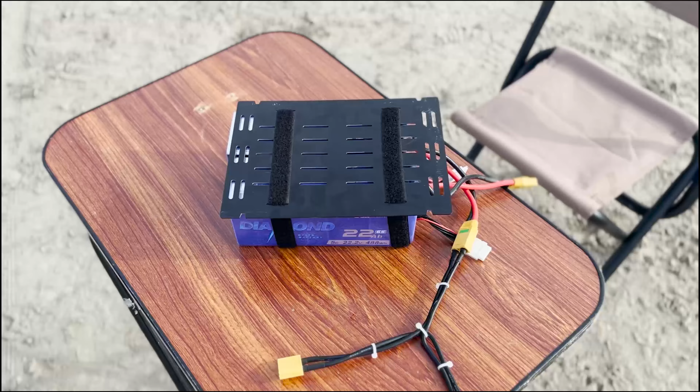It has an empty weight of 16.5 pounds and can bear up to 14 pounds of payload. The Hobbywing X6 motor has a maximum thrust of 12 kg per axis. Its high-strength aluminium alloy material optimizes structural design. The 23 by 8.8-inch propellers are used on the Recluse to provide lift and stability. Recluse uses two LiPo 6S batteries in series with a total capacity of 22 Ah.

Recluse is equipped with the Pixhawk Cube Orange autopilot system and uses Skydroid H12 radio system and GoPro Hero 5. Recluse is equipped with 6 high-performance Hobbywing X6 180 kV motors with 23-inch carbon fiber propellers attached with 60 amp ESCs, giving it higher efficiency and more stable performance. The propulsion system can carry a load of 39.6 to 86 pounds. The propellers have an optimized aerodynamic design.

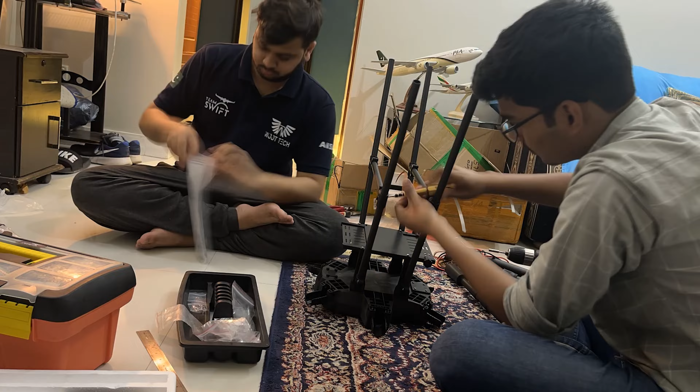The objective of the SUAS competition is to design and operate an autonomous unmanned aerial system that can complete a mission within a specific time frame and meet certain requirements. These requirements include keeping setup time under 15 minutes, mission time under 30 minutes, ensuring 95% or a higher waypoint accuracy, and delivering an object within 15 feet of a potential drop location without damage.

The system also needs to be able to detect objects autonomously and classify them as standard or emergent, communicate between the drone and ground station through encrypted communication, and use video transmission. To achieve these goals, the system requires two operators, a safety pilot and a GCS operator. Obstacle avoidance is achieved through the use of sensors, algorithms, and classifiers.

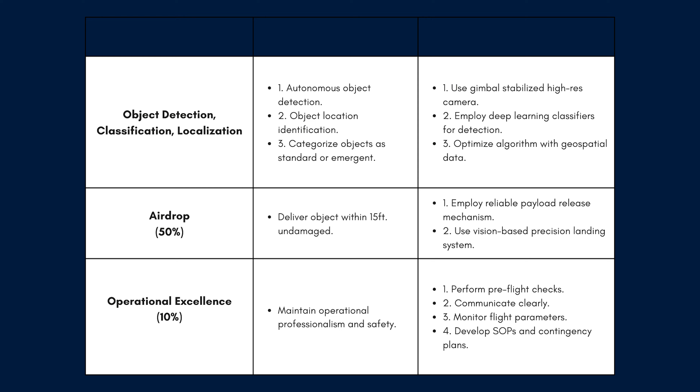The system must be optimized for operational excellence and able to adapt to changing conditions during the mission. The design of the UAS plays a crucial role in ensuring that the system meets all requirements and can perform the necessary tasks efficiently and accurately. We chose a hexacopter as our aircraft system because of a high payload capacity, high maneuverability, and compact design.

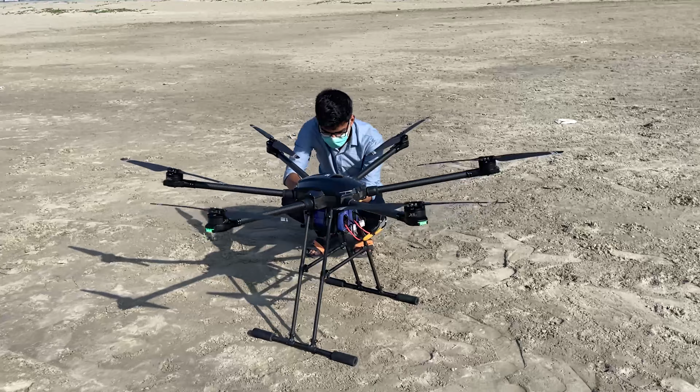Recluse is made wholly of carbon fiber, making it lightweight with greater tensile strength. It has a wheelbase of 4.2 feet and a height of 2.25 feet. Recluse has a full load weight of 36.2 pounds and can fly for 45 minutes at a maximum speed of 28 miles per hour without any complication, making it possible to complete missions in a minimum time of 25.7 minutes.

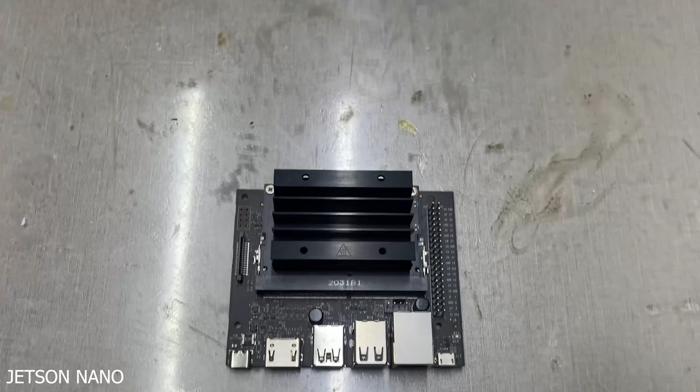choice for the camera: weight, cost, effective megapixels, and hardware compatibility. Recluse uses the GoPro Hero 5 camera and relays the photos to the ground station for classification and review. It takes a picture depending on the algorithm's ability to recognize when and where it is prompted to take a photo for image classification. This 12 megapixel camera can resolve objects required by the competition with high accuracy due to its high horizontal FOV of 122 degrees and vertical FOV of 94 degrees.

The camera offers a maximum resolution of 4K with maximum 30 frames per second. We will be using a 2-axis brushless gimbal for camera stabilization and 2-axis control. The team uses an algorithm to autonomously detect, localize, and classify the objects from an image. A convolutional neural network (CNN) was developed to autonomously detect, localize, and classify objects.

A custom modified deep learning architecture called YOLO is used to detect the underlying shapes and the class of emergent objects. The architecture was trained on a customized data set that contained almost 700,000 target images. The data set included all possible combinations of target characteristics such as varying heights, terrains, obliqueness, rotations, and noises.

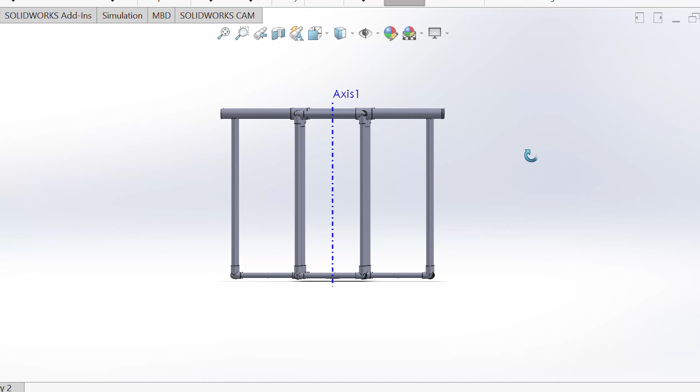Our drone can safely drop 500 gram bottles from 75 feet using parachutes, making it the perfect solution for emergency supplies, food and water drops, and more. Our payload consists of 5 bottles, each weighing approximately 500 grams and holding 16.9 ounces of liquid. They're supported by a sturdy carbon fiber frame with flaps that hold the bottles in place while in the air. Each bottle is wrapped with a durable shock-absorbing material and attached to a folded parachute, ready to be deployed when it's time to drop.

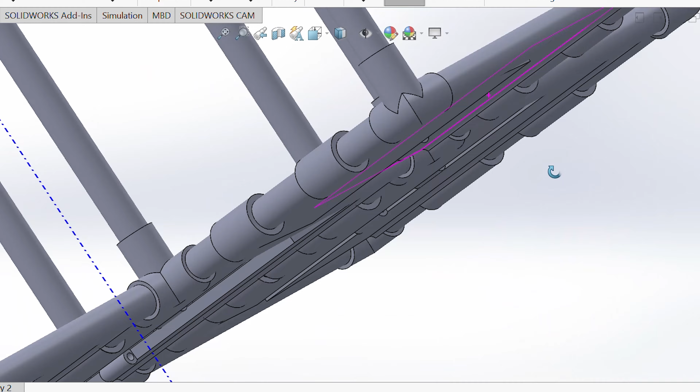To determine the optimal drop time, we use our drone's advanced autopilot system, which calculates factors such as wind speed, direction, payload weight, and parachute size. The drone hovers at a height of 75 feet when the target location is detected, and the autopilot system activates a corresponding servo, which rotates the flap beneath the compartment holding the bottle by 90 degrees, releasing the bottle within. As soon as the bottle is dropped, the parachute opens, allowing for a controlled and safe descent to the ground.

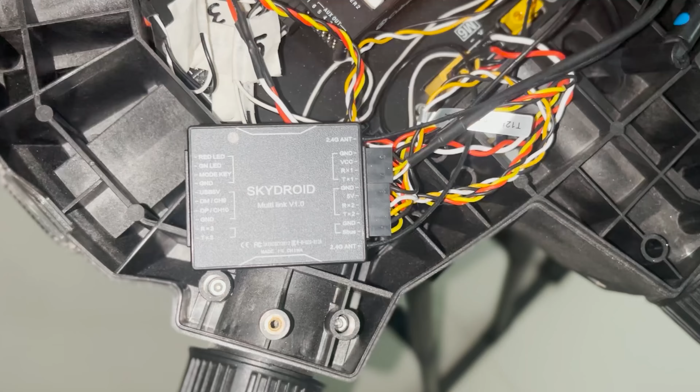The SkyDroid H12 radio system operates in the 2.4 GHz frequency range with a maximum range of 30 km. To establish communication between the drone and the ground station, the SkyDroid H12 radio module is connected to the Pixhawk flight controller. 900 MHz telemetry allows the wireless communication of data from the ground station to the drone. It can operate in the range of 900 to 928 MHz frequency. The expected performance of the SkyDroid H12 radio system is reliable communication with low latency and high throughput within the specified range.

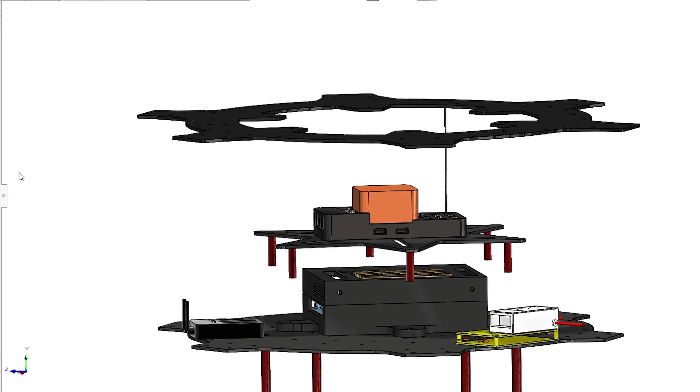Recluse is powered by two high-capacity 6S batteries with a total capacity of 22,000 mAh, providing increased power output for advanced flight performance and protected by an impact-resistant waterproof casing. It provides Recluse a longer flight time without compromising on the functionality of other systems powered by it.

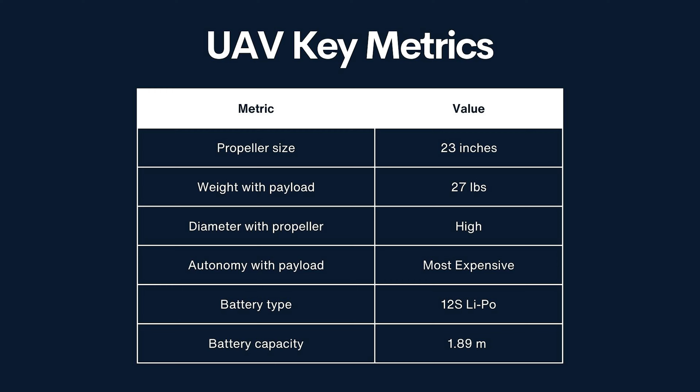Recluse is equipped with 6 high-performance Hobbywing X6 180 kV motors with 23-inch carbon fiber propellers attached with 60 amp ESCs, giving it higher efficiency and more stable performance. The propulsion system can carry a load of 39.6 to 86 pounds. The propellers have an optimized aerodynamic shape, which gives the aircraft system its high thrust. The Recluse was able to reach an altitude of 656.2 feet during the flights. It was able to reach a maximum speed of 30 miles per hour.

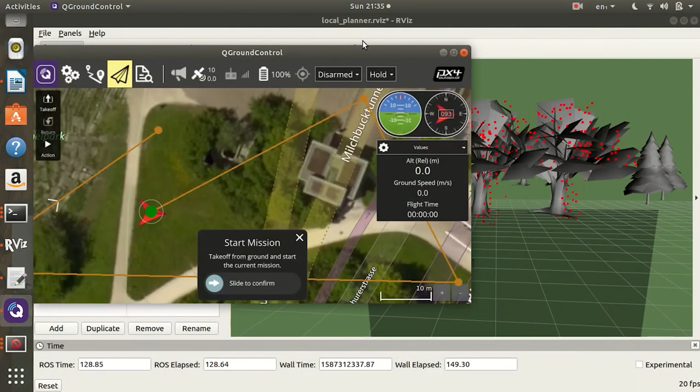To accomplish the task of obstacle avoidance, our team utilized multiple single-direction TF Mini S micro lidars. An algorithm created by our team utilized waypoint coordinates, obstacle zone centers, and obstacle zone radii as inputs. The algorithm's initial task is to find the shortest path between the waypoints without changing their order. To accomplish this, the algorithm employs the practical and effective Dijkstra's shortest path algorithm.

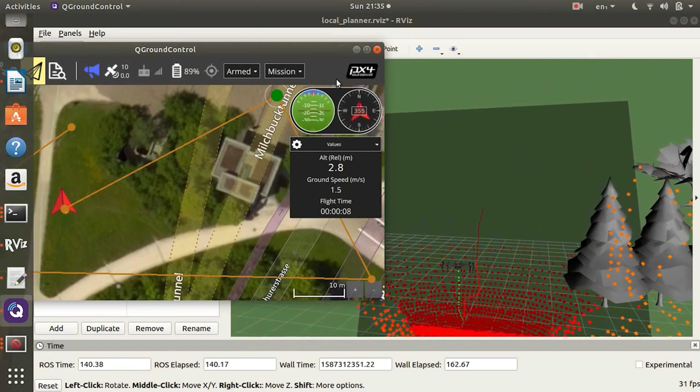In cases where there are obstacle zones present between the waypoints, the algorithm selects an alternative route that is both safe and efficient. Subsequently, the sensors installed on each side of the hexacopter detect any approaching UAVs and modify the flight path to avoid them while maintaining the shortest possible route.

Throughout the design process, our team explored several alternative options before settling on our final design. Initially, we considered quadcopters as an alternative to the hexacopter, but they had limited payload capacity and couldn't lift as much weight as the hexacopter. Jetson Nano was selected among the two other leading companion computers as it had a high processing speed and more RAM, plus it was a cost-effective investment.

Even though the Cube Orange Plus was the expensive choice, we went for the highest processor speed and user-friendliness among the choices at hand. We also tested various frame materials and designs, including pentagonal frames, rectangular frames with different orientations, and materials such as steel, wood, and aluminium.

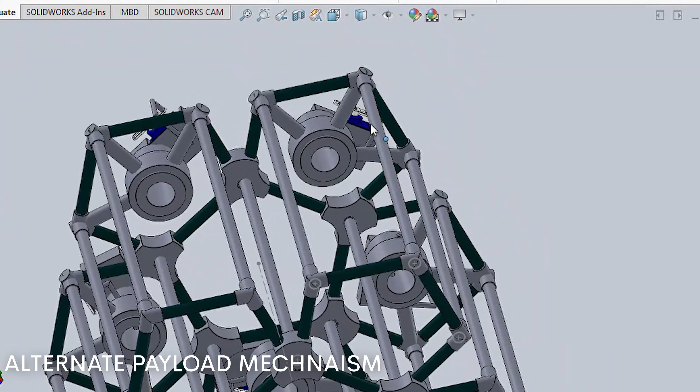However, after rigorous testing and analysis on SolidWorks and ANSYS, we concluded that carbon fiber was the optimal material for our drone's frame. We went with the Hobbywing X6 as it was giving us great balance between thrust and cost. The downside was weight, however there were no negative implications to it. Taking in view the cost, capacity and weight of the battery to provide sufficient flight time, we went with two 6S batteries coupled in series.

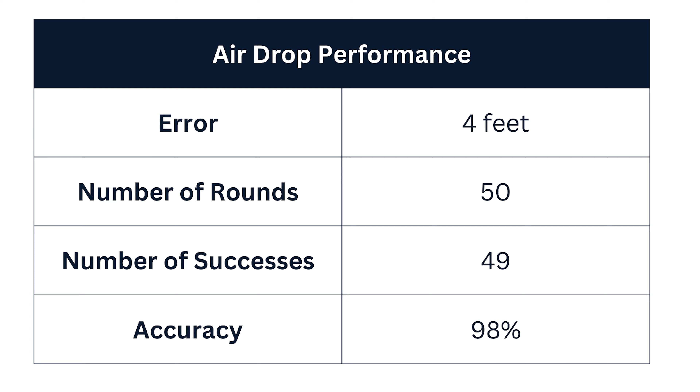The airdrop subsystem underwent rigorous testing to ensure its performance. In total, 50 drop tests were conducted both autonomously and manually, out of which 49 were successful with an error of 4 feet. The SkyDroid H12 radio module communicates telemetry with the ground station using a 2.4 GHz frequency. It had a range of 4.4 miles in air and 0.93 miles on the ground. The subsystem was able to handle interference from other devices such as Wi-Fi or Bluetooth without any significant impact on telemetry data transmission.

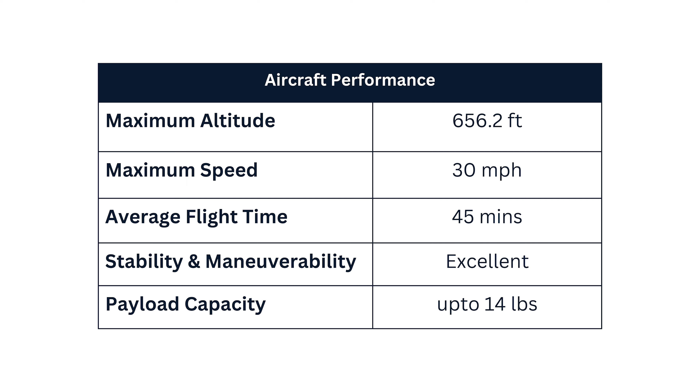To test its capabilities, 143 flights were carried out under different conditions with an accumulative flight time of 23.8 hours. The Recluse was able to reach an altitude of 656.2 feet during the flights. It was able to reach a maximum speed of 30 miles per hour and stay for an average of 45 minutes in the air. The stability and maneuverability were smooth and efficient. The aircraft was tested in windy conditions of up to 28.8 miles per hour on the sea view in Karachi.

The autopilot's advanced flight capabilities include waypoint navigation, automated takeoff and landing, and automatic mission planning. The Cube allows us to fly safely with precision and control. We were able to attempt 67 autonomous flights with a 100% success rate. With an error of 2.3 inches, we were able to navigate through all of the waypoints we set for ourselves. 300 obstacles were encountered by the Recluse, out of which it was able to avoid 298 of them, giving us an accuracy of 99.33%.

Our team completed the pre-flight checks within 10 minutes. Once our system was operational, we had a briefing of 5 minutes before executing the mission command. During the mission, our aircraft flew along a waypoint path and autonomously came within 10 feet of each waypoint while avoiding static and dynamic obstacles. To ensure connectivity between the ground station and aircraft, we used a radio antenna. The aircraft detected standard and emergent objects on the ground, classified and localized them autonomously on board, and sent the signals to the ground station where its performance was monitored.

The aircraft was able to drop the payloads within the target's radius. After all the payloads were dispatched, the UAS activates the return to launch mode to find its way back to the starting location while avoiding any hazards. After the UAS touched down, the crew carried out post-flight inspections to guarantee safety before clearing the scene. We conducted at least 15 mission tests and solved the arising problems by checking the checklist over and over again to ensure normal and emergency procedures were in place. With each mission test, our scores improved as we continued to troubleshoot.

Our team achieved a high score of 95.25%, which was broken down into 84% for timeline, 100% for operators, 97% for airdrop, and 100% for operational excellence judged by our advisor. We expect to achieve better results during the mission demonstration.

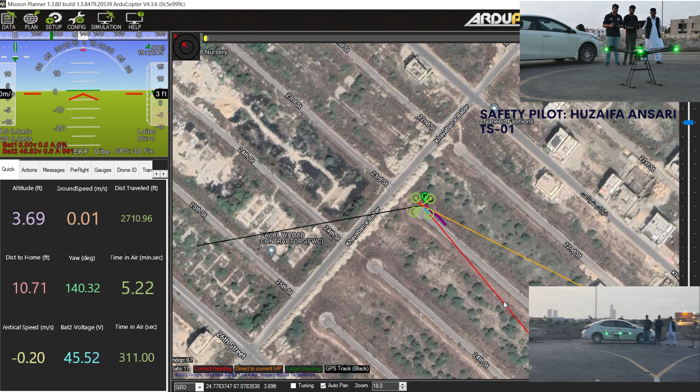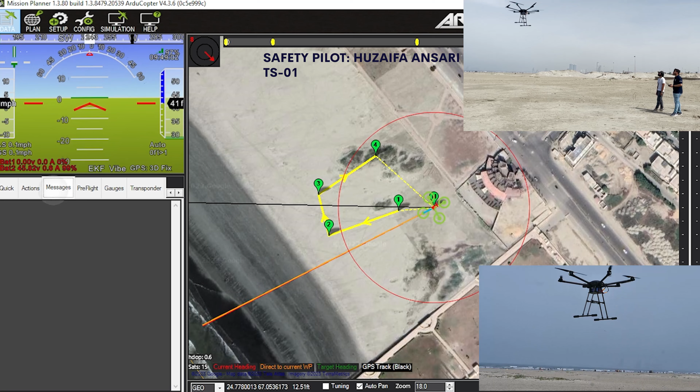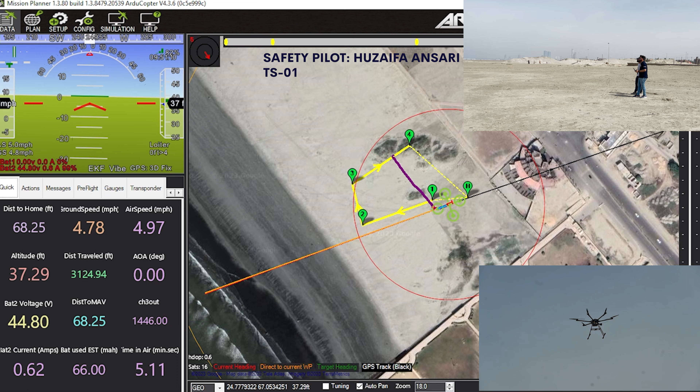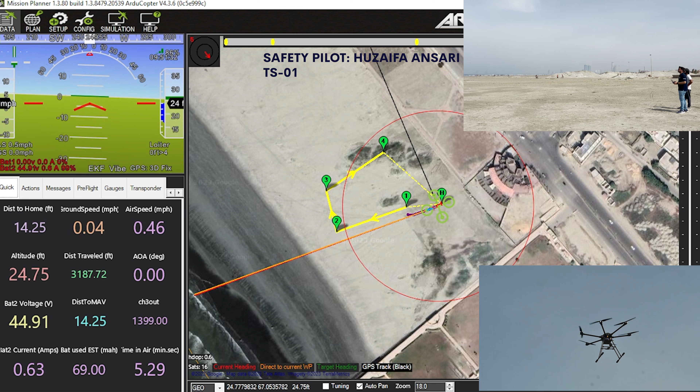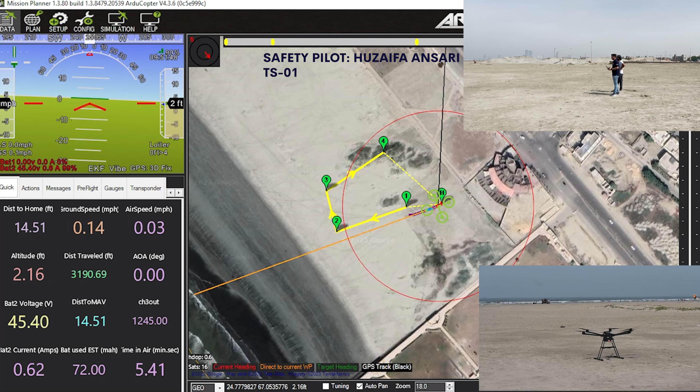Five, 60, 55, 50, 45, 40, 37, distance is 50, altitude is 38, distance is 25, altitude is 30, distance is 20, distance is 15, altitude is 20, 10. Arming, stand clear, taking off.

Over the course of the past year, a systems engineering approach was implemented to develop and improve the performance of the UAS, designated for package delivery. The system was refined, tested and enhanced to ensure efficient mission execution in line with the requirements of multiple package delivery companies. Major subsystem overhauls were undertaken, including custom development of airframe parts, onboard parallel processing and deep learning-based image classification algorithms, all of which were thoroughly reviewed during testing and integration.

The development process spanned 1 year, during which meticulous system testing was conducted to train team members and expand their knowledge and experience. The result is a reliable system capable of avoiding other UAS, traveling to the customer, identifying potential drop locations, and delivering packages to a safe location.